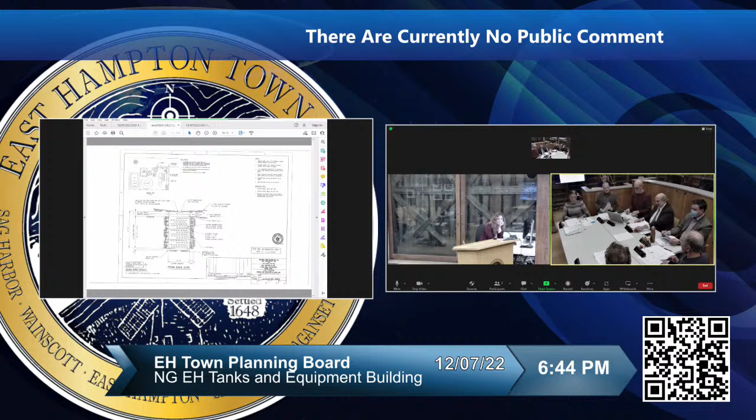This seems ready for approval to me. Thank you very much for accommodating us on the additional dry well capacity. I think that's important, and given that we've determined the truck is not a structure, we can waive the public hearing. Let's waive the public hearing. Well, we did that last week. We did, and I think it was 5-2.

So there's no public hearing on this. Right, so we have a resolution also in the regular meeting, so unless anyone has anything they want to add.

Well, I'm going to vote for it, but I want the board to consider: what if a restaurant wanted to park a 28-foot truck every summer for the foreseeable future to provide refrigeration for their restaurant? I think we're treating the utility well, and we all need the utility, and I'm not looking to block it, but I don't think it's a great precedent.

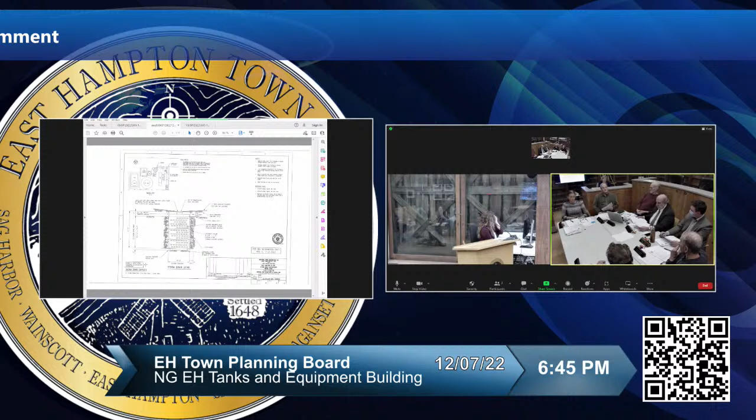What part of it? The no public hearing or the truck itself? The truck - the building inspector said the truck body would be... I don't recall exactly what the truck rules are, but if any other commercial applicant asked us to put a 28-foot truck alongside their driveway every summer for the foreseeable future, I don't think we'd be open to it.

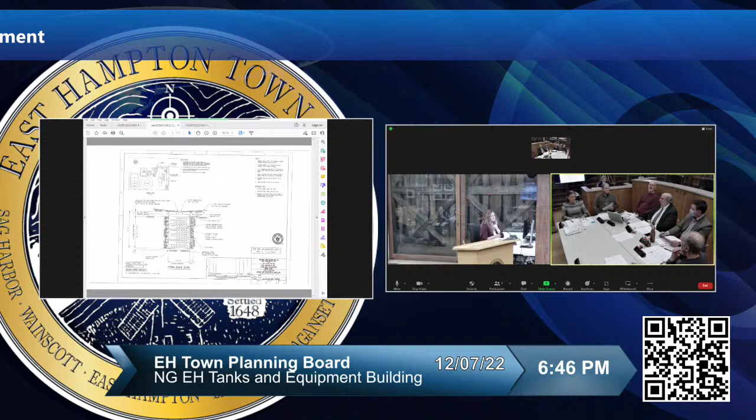Well, for one thing, this is a different parcel. I drive past it regularly, and I'm forever craning my neck to see exactly where this is. And I agree, it's not like it's in Downtown Montauk. I think maybe a truck would be okay if it was totally screened in some way, and we might consider that if it was hidden.

It's true, this is 17.6 acres. Yeah, that's another thing. Any restaurant that was 17.6 acres out here wouldn't be a restaurant very long - a wedding hall, with plenty of parking. So, all right, but I would have liked to have seen a public hearing on this, but the board chose not to.

So if anyone else has anything else they want to add? If not, we go forward with the resolution.

In the matter of the application of National Grid East Hampton Tanks and Equipment Building Site Plan, minor site plan, Suffolk County Tax Map 300-185-2-2, minor site plan approval. I have read the findings and determination document and called for its adoption. Is there a second? Second. All those in favor? Aye. Passed 7-0.

You got here just in time for the big win. It's a good thing we don't sell tickets. That was fake. All right, do you want to do more of this kind of stuff?

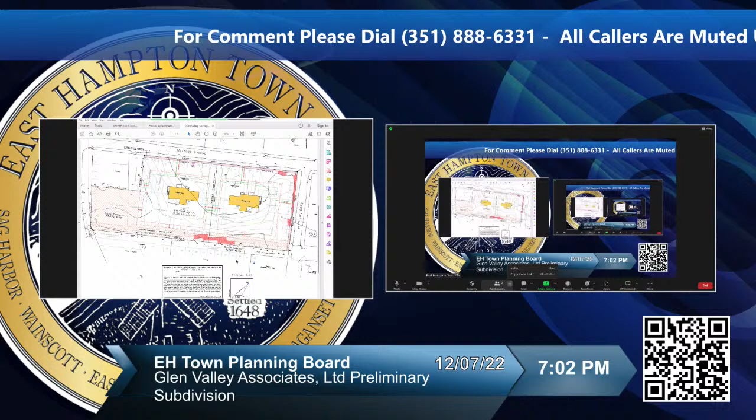Most of what he said... there we go. Okay, they're back. Matt, when did it cut out? I would say about 30 seconds ago, maybe a smidge longer.

Did it happen last night again? I'm sorry about that, I would say about 30 to 45 seconds. Ian was just wrapping up when it went out, I believe.

What do you think, does he need to reread it? I wouldn't think so, I think you've got the gist of it across. If you want to reread the last paragraph, that would be sufficient. I was hoping you'd ask, thank you. So enthusiastic about it, just the one.

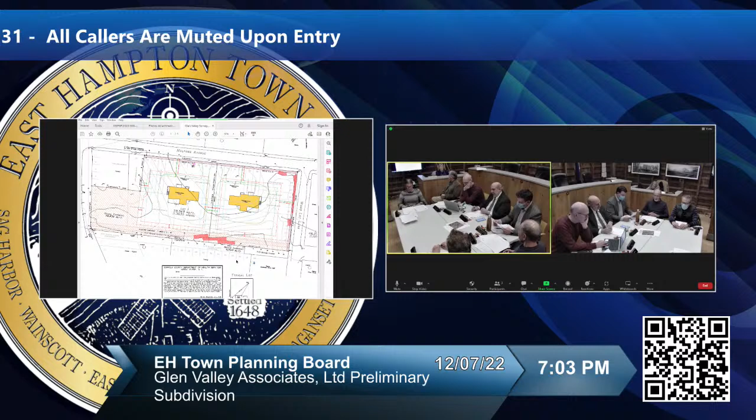Any person or party wishing to be heard with respect to the foregoing may do so in person, by agent, by attorney, by calling into the live stream, or by written comment addressed to the Planning Board, 300 Pantigo Place, Suite 103, East Hampton, New York, 11937. Comments may also be submitted to the Planning Board by email to planningboard@ehamptonny.gov. All comments must be received by the Planning Board by the date and time of the public hearing, dated November 9th, 2022. Samuel Kramer, Chairman.

That was about 30 seconds.

So do we have jurisdiction? Yes, we do, Chair. I reviewed the affidavit of service and posting, and it does appear that it was properly noticed. Very good. Want to give us a little background?

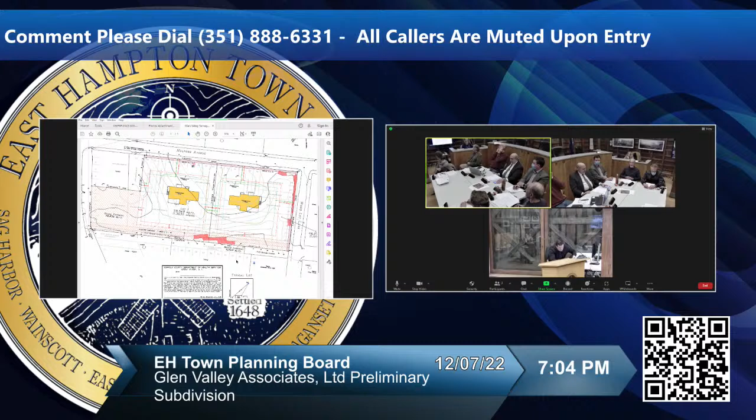This is an application to subdivide an existing parcel that's 107,795 square feet in lot area, located on Mulford Avenue and Old Northwest Road in East Hampton. The parcel is located within the Water Recharge Overlay District. It was originally reviewed in a pre-preliminary form before being reviewed in a preliminary form, as you see here, by the Planning Board.

In the course of the review, the board agreed that the parcel contains an existing 50-foot wide scenic easement on the eastern portion of the lot that abuts Old Northwest Road, and a 5-foot wide utility easement held by the Town of East Hampton on the north, south, and eastern property lines. The applicant's proposed subdivision would result in two conforming lots.

When the application was reviewed by the Planning Board, they agreed to assume lead agency status, which they did. The applicant was required to submit an Old Filed Map modification application to address the proposal's potential changes to parcel 60 in the Old Filed Map Study, and was required to submit a more comprehensive survey showing the location of all surrounding wells and sanitary systems in a conforming sanitary system envelope. The applicant submitted all these things, including the Old Filed Map modification application. So that's kind of how we got here today.

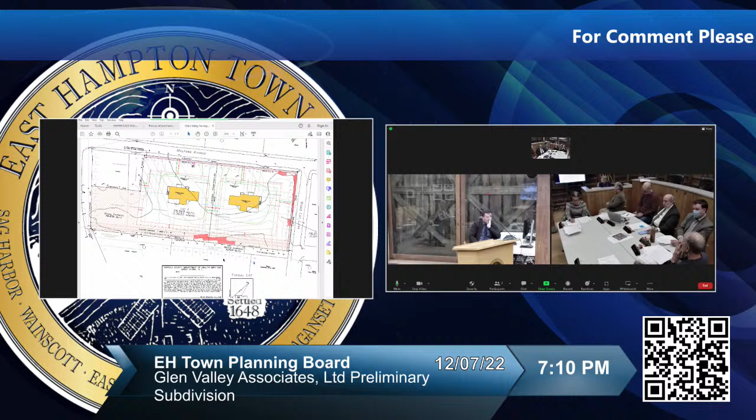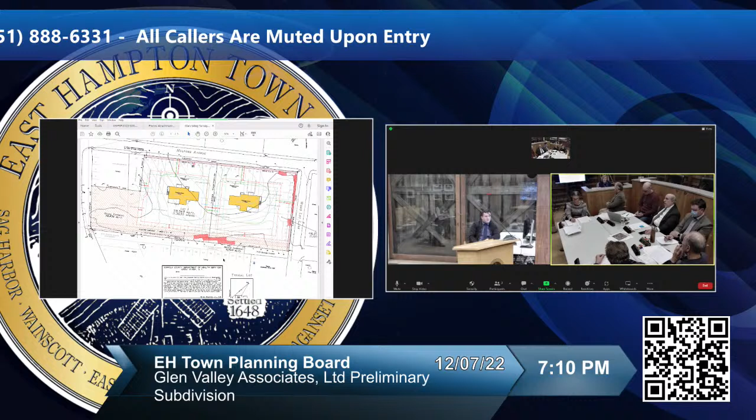Yes, we have one caller. All right, let's see if they're here on that particular application. Okay, unmuting last four digits of 2740. Hello? Hello? I can't hear the person. Can you do something with the volume, Matt? Hello? Very soft spoken. Caller? Caller? Ending 2740? Hello? Okay, call. Hang on, Sam. Yeah, okay. With, I'll, Matt, tell you what. Thank, Sam. Sam, go ahead, proceed. They hung up. They hung up? Okay, and you have nobody else on queue? Matt? Zero additional callers. Thank you.

Okay, in that case, Mr. Buda, you can resume for 3 minutes. Thank you. Ordinarily, the open space is designated as a separate reserve lot.

According to the town code provisions applicable to this matter, a minimum of 25% open space must be established on the subdivision map as one or more separate conservation easement areas, and the extent and nature of that easement should also be specified in a separately recorded conservation easement instrument, granting and limiting the restrictive easements to the town or to a private conservation corporation or land trust approved by the planning board.

Although the proposed subdivision map does indicate that more than 25% of the two building lots would be encumbered by scenic easements, I did not see anything indicating that these scenic easement areas would be excluded from the confines of the two building lots, or that they would be established by separate grant in favor of the town or a private conservation corporation. The applicant's initial filing letter dated April 1st misstates that there is an existing 50-foot wide scenic and 5-foot wide utility easement in place—I believe it's actually a road widening easement.

In fact, what he must have meant and been referring to is the fact that the old filed map study plan requires that such easements be granted to the town as a condition precedent to the issuance of any building permit. As far as I can determine, that requirement has not yet come to fruition and these are not yet existing easements.

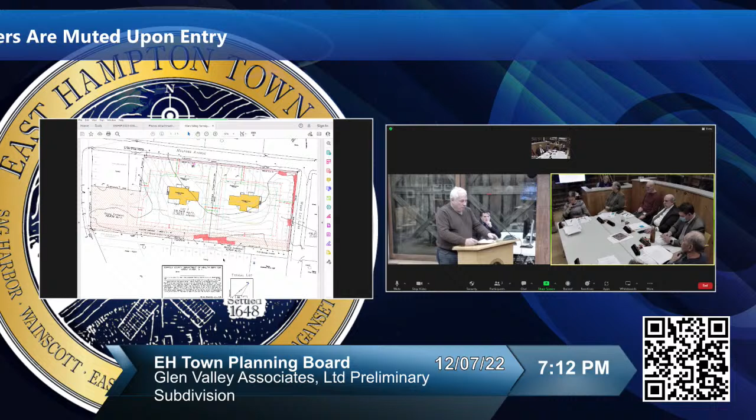I do understand that there is an ongoing parallel process for modifying the urban renewal map to conform to the provisions of the subdivision when it is granted. There may also be imposed a roadwork monetary contribution requirement, because there will now be 2 UR parcels where there was only one in existence before, when the special road district for this area was created.

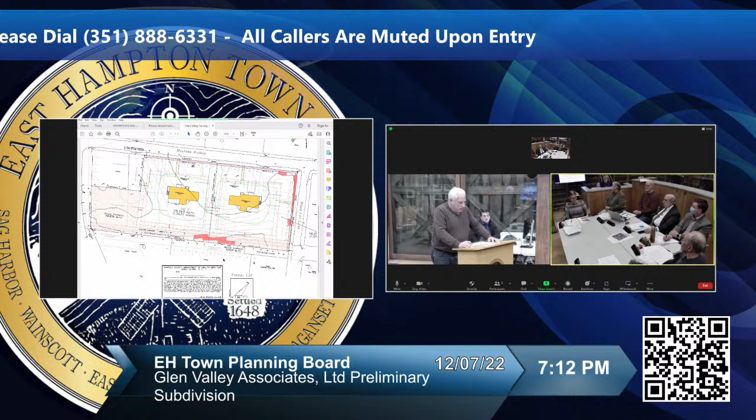I would suggest that the planning board instruct the town consulting engineer to carefully review the provisions of the UR road improvement district map, for map 284 and map 483, to determine whether or not any additional monetary contribution should be required to be paid to the town, because at the time of the creation of that taxing district, the 2 proposed lots constituted only 1 UR parcel. Thank you very much. Thank you.

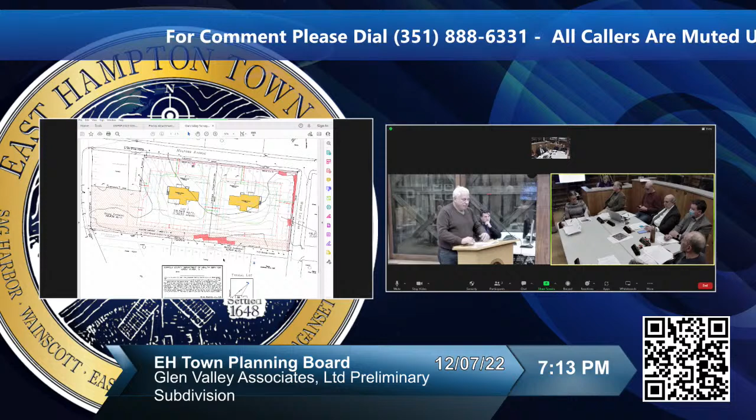40 seconds. I'll say it. No, we don't bank those.

Does anyone else have any desire to be heard right now with respect to the Glen Valley Associates application? In that case, if the applicant would like to be heard, and also 3 minutes.

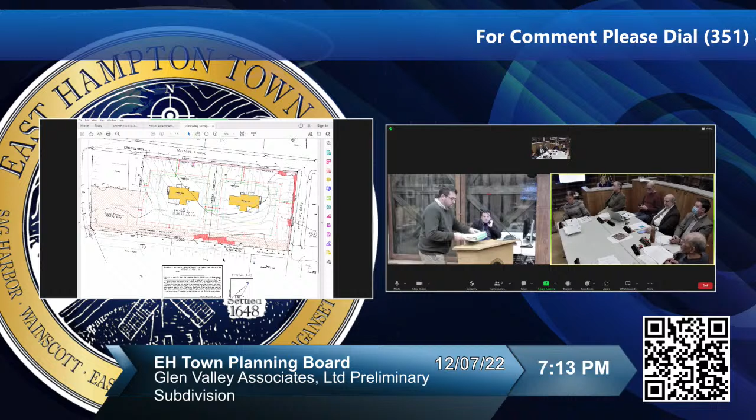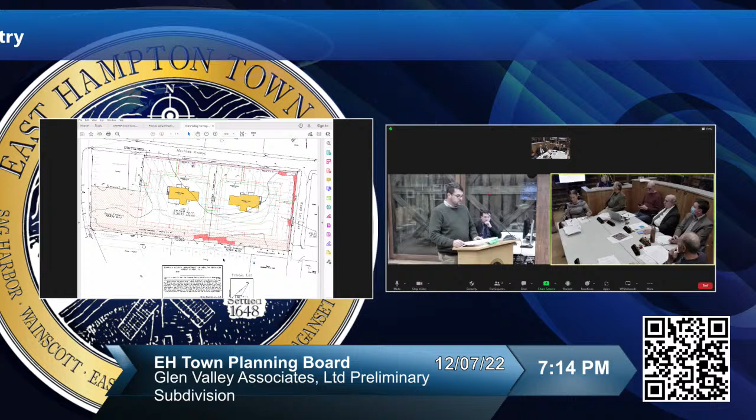Good evening, members of the board. Brian Locassi with the Adam Miller Group, attorney for the applicant. As you know, we've been before you for a few months now, and I respectfully submit that this does meet the 25% lot open space requirement. We had reviewed this with the board, with the planning department, and we set that aside. We addressed concerns regarding sloping, covenanting the 20% sloping within that set aside open space area. So we think that respectfully, we're creating two conforming lots. It meets all the criteria of the code and subdivision requirements, and we respectfully ask that we proceed with an approval for the application.

Is nobody else seeking to be heard on this? Ian, if you'd like to. Motion to close? Is there a second on the motion to close? All those in favor? Aye. Public hearing is closed. Okay, next is Pete's Garden Center.

Take notice that a public hearing will be held before the East Hampton Town Planning Board at Town Hall, 159 Pantigo Road, East Hampton, on Wednesday, December 7th at 7 p.m., or as soon thereafter as this matter may be heard, to consider the application of Pete's Garden Center and Service Commercial Site Plan Special Permit Approval pursuant to Articles 5 and 6 of Chapter 255 of the East Hampton Town Code to construct an outdoor storage yard with 3 on-site parking spaces, 7 parking spaces in the right-of-way, sidewalk, and additional fencing. The parcel contains 8,200 square feet, 0.1882 acres, and is located on the northerly side of South Euclid Avenue, Montauk, and is situated in a central business zoning district as shown on the official zoning map of the town of East Hampton, identified on the Suffolk County tax map as parcel number 300-49-1-13.3. Subject application is classified as an unlisted action pursuant to the State Environmental Quality Review Act, SEQRA, Part 617 of the New York Code of Rules and Regulations, and Chapter 128, Environmental Quality Review of the Town Code.

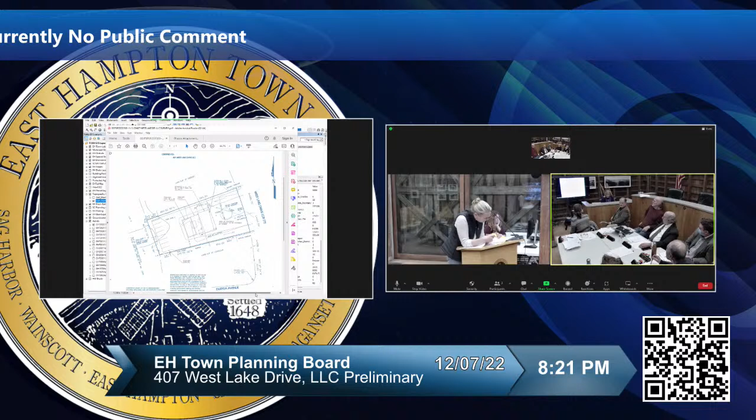The whole idea of putting parking behind buildings is so you don't have to look at it when you're driving by. It's a planning and aesthetic decision the town made a long time ago, and that's been the policy, put the parking behind the buildings so you don't have to drive by and look at parking lots. I agree with that policy, but sometimes you need to look at an individual property, and if you apply a general policy that doesn't fit, it doesn't work.

I don't think you're gonna get what you're looking for, Lou, when this is all built, and there's not gonna be a lot of vegetated open space. For one thing, there's a giant tree where they have parking right now. Maybe you keep the tree in the parking lot. How do you get the cars? Is it in the middle of where the cars pull out?

Kind of, the parking is off to the side. You can't really see where the parking is supposed to go. Do we know how healthy that tree is? You can design around a tree.

We're not very good at doing parking lots in East Hampton, honestly. We just tend to do a big macadam. Other parts of the country, they put a lot of trees and vegetation and break up the asphalt. Other places in the country have more land to play with.

So the one thing I would say is... anything else on that? You're leaning towards parking, but not in the front. Okay, you're gonna be keeping score on that. I am, okay go ahead.

Well, on the subject of parking, I like what the other hotel has along the side like that. That's all I got. And Lou, you would be okay with that too? I would prefer that than to put the parking in the back.

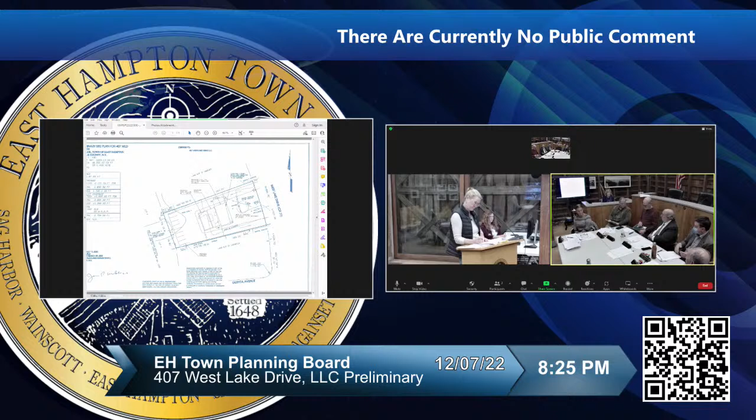I would say that one ingress and egress would be preferable, just because it's less coverage, there's more room for other things. But take everything I'm saying with a grain of salt, because this is very early in the process. Again, if you are code compliant, I think that goes a very, very long way.

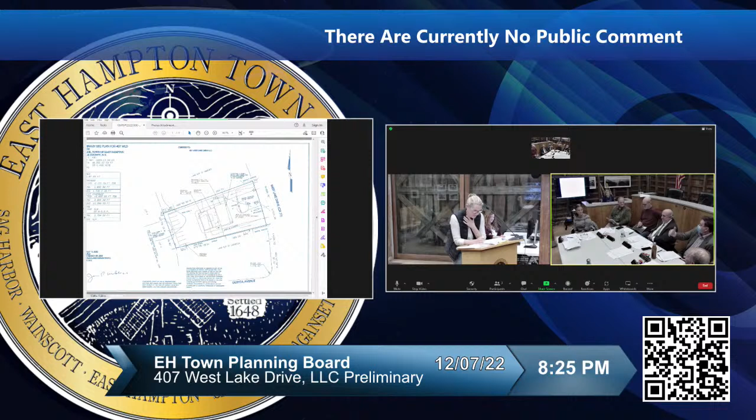As far as parking goes, I think Randy pointed out, as long as I've been part of the community, we've been a mullet planning community, with the business in the front and the parking in the back. So that would be my starting point. Parking in the back - that's what the guidance and the code directs us to do.

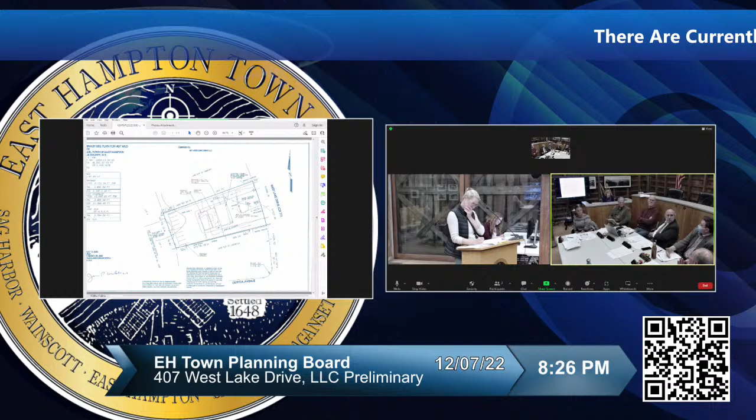I agree with Lou that there's special cases. I'm certainly open-minded to have parking in the front. The one caveat to parking in the back is that if you're abutting a residential zone, we're not going to be very likely to relax the setbacks if it's not necessary. I don't think we need to. I don't think we need to either. So I don't know enough about the property or the space, so I'm open about parking.

And the same thing with turning the building sideways, that would be a very different design. Wouldn't have a real problem with it, but I think we then would have to talk about setbacks, especially to the south, because is that still a resort district there? I believe it's a resort district, but it's a residence. Yeah, I'm almost positive it is resort district.

I think it's an interesting idea and you should explore it. But with the way it's laid out with the pool behind the building, I'm not sure that it's going to fit with what you're trying to do. So I don't have incredibly strong opinions.

I think the only thing I've said that maybe we haven't talked a lot about is if you can have one curb cut, seems like it's achievable. It would help you save a tree, it would give you more room to work. I have a slight leaning towards parking in the back, but if you do it in the front and make it work and it looks nice, I'm open, and I certainly don't want to have a tug of war here where you can't please any of us.

Good point, but I'm only one man, so. Thanks very much, Ian. Lou?

Yeah, I'm sticking with my parking. That's your story and I welcome everyone to go visit the site, and I think if you look around, you'll change your mind about the parking.

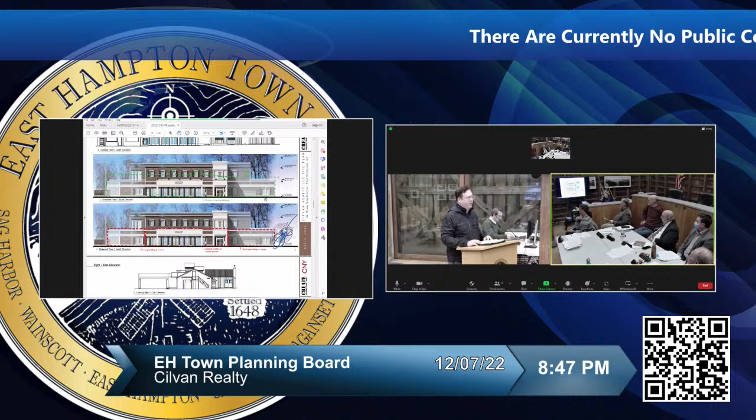Anyway, it's a complete change in the architecture. The building's pretty much about the same size, but the design is very different. As I said, I'll talk to my clients. In general principle, I would agree with what Eric said. I just don't know what the ARB schedule is. The other comments, as Eric indicated, are really just kind of the landscaping.

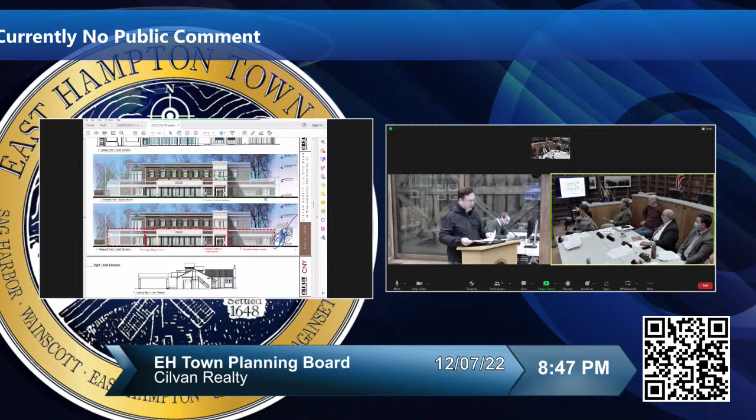Let me just say this: obviously there's importance to landscaping along Three Mile Harbor Road, but on the east side of the property you have three residential lots. The northern two are fairly old. I've been back and visited the site again - there's a pretty good bank on the right-hand side. It's almost like they dug out this parking lot when they built it, because it's down about two to three feet from Three Mile Harbor Road. And on the back eastern side, there's a bank about four feet high.

The northerly two lots, right here, both have approximately six foot tall stockade fences at the top of the bank. So they're pretty well screened, and those houses are also forward in the lot. The southerly lot doesn't have a stockade fence, and the house is towards the back of the lot. I think that's the thing that most needs screening. And I think in your memo, Eric, you refer to the screening generally on the east side. I thought we have some 8 to 10 foot red cedars in this area.

Sorry, I just flipped it 90 degrees on you. You want me to go back to the area? You'd have to look - it's easier to see, you have to look at the key. But where were you pointing? Somewhere in this area, I think we have 8 to 10 foot red cedars near that southerly house. I just wanted to confirm that.

We are proposing our own fence. I don't know how that'll work where the neighbor fences are, but we are definitely going to propose a six foot fence here. But like I said, there are existing six foot fences there, not on top of the bank - or on top of the bank. The neighbor's fences are on the bank, on top of the bank. I don't know exactly where ours will be placed.

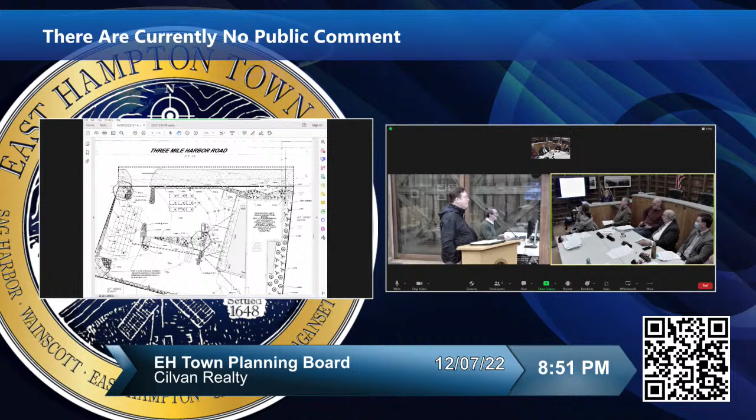But yeah, the direct answer to your question is no, I have not seen the plans for the redevelopment. Have you applied to them for a curb cut, or do you not need to? We've had plenty of communication with the county. No, we have an existing curb cut. I think we're changing it slightly, so I assume we'll need a DPW permit however we tweak the driveway. Obviously, we're removing part of the driveway. I don't know if that permission is needed, but we've been in communication with the county DPW, and whatever permits they require, we'll obtain.

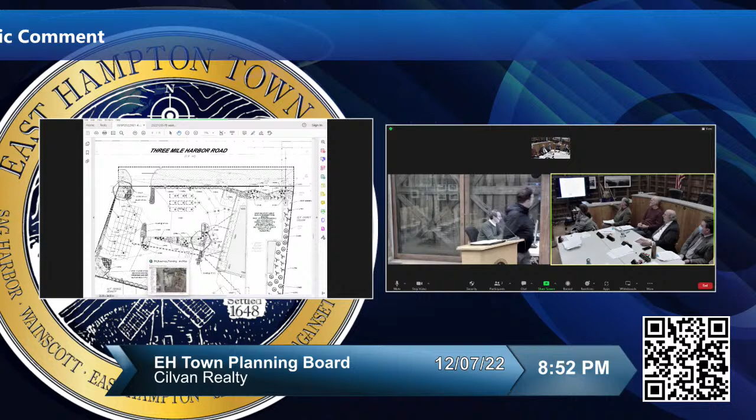The curb cut is pretty close to the existing building, if my memory serves, as it presently exists. Yeah, there you are, yes, there's two. Are they two real curb cuts, or is one a de facto curb? No, I drove out this one. Just because you used it doesn't mean it's really a real curb cut. No, they're two real curb cuts, they're actual. So you have two actual curb cuts on 3 Mile Harbor? Oh yeah, well, the proposal's only one, and it's in the right place.

That's wow, okay. Hey Rick, remind us, how tall is the vegetation that's along 3 Mile Harbor Road? I forgot, not much. There's one notable tree. Other than that, there's not much on 3 Mile Harbor Road right now.

Okay Sharon. Much improved. Yeah, actually I like the building better that you've come up with, it's more streamlined. I think we're really loving the whole gabled old house look. So hopefully the ARB likes it too. I think the lighting they're gonna take care of, it's really just the landscaping. And thank you for moving the dumpster, I think that's a huge improvement to get away from the residences.

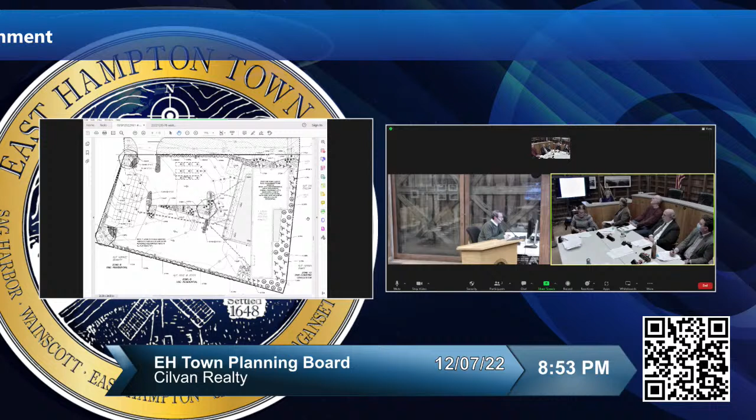It's really just the landscaping and the fact that they don't have the space to double up on that back line, and there's gonna be a fence and there's a bank. I'm not sure what else they can do there to make it any better than what it is, so I think it's sufficient.

I think I have some photos of that area too, which might help. I'll look them up while you're having your conversation, just so in case you're wondering what's going on with the screen. Thanks, Randy. You have anything you want to add?

Yeah, it would be interesting to see what it's gonna look like looking, when you drive by on 3 Mile Harbor Road. Not sure, it looks like it's fairly flat from the road. Where does it drop down? It drops down, it drops down pretty well.

So the screening... Fortunately I can scroll through different times of the year. Yeah, an empty parking lot. Yeah, there's all that greenery now. I don't know if you can see all the green. These are from about 2 years ago.

Well, we can keep going, right? Yeah, yeah, yeah, I was just... Anything else, Randy? No. Michael? Nothing to add. Ian?

Yeah, I think it looks good. I think the dumpster move was key for the neighbors, I'm glad that you were able to work that out. Hopefully that wasn't a problem with the ARB. I'll just say that as far as the architecture goes, I'm not gonna nitpick that, I think that's the ARB's world. I'll focus on the planning elements, which I think are generally good.

One question about the arborvitae in the front, my Latin's not very good. The arborvitae you're planning are not green giants, right? They're more compact, I just want to make sure that's true. You don't have to answer if you can't. I'm sure that they're not. I don't think that we have any dark green giants.

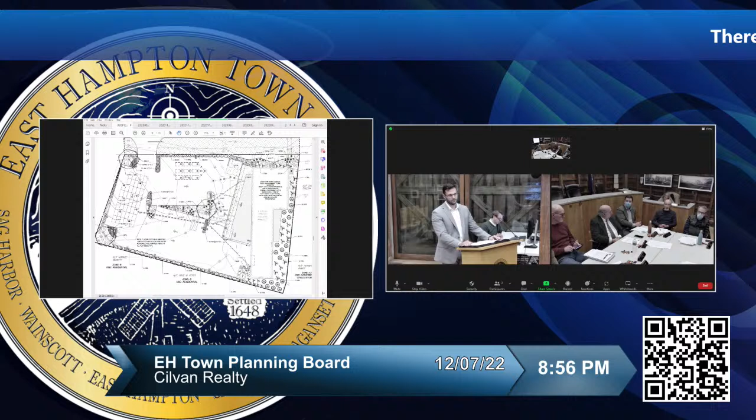Yeah, I think we've come a long way. We've been through a lot, made a lot of changes, so I think we're there. I agree with Sharon and everyone else.

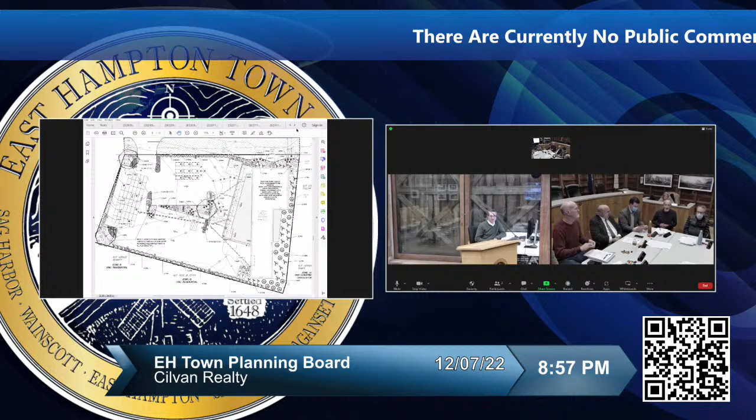As far as the ARB, I watched that meeting as you did, Rick. And boy, did they make pointed comments. They basically didn't pull any punches. They excoriated the poor person there. That was you, right? Dave went by himself. No, and I learned a lot. They delved into areas that I didn't think of, but I guess that's why they do what they do.

But I agree with Eric. I think you should get that all cleared before we have a public hearing. That's all I have to say. Thanks. I think everything's been covered. Let's move ahead.

Yeah, I agree. It's just a practical matter. If the ARB is moving as fast as it seems, you won't be held up too terribly long by waiting for them and then coming to us, and then we'll do the public hearing. We're lead agency, so let's lead.

Well, the only other thing is the lighting plan. You understand the deal, but before it's complete, you probably won't wait for the ARB, but just make sure the bulbs are all good and the fixtures are good. Yeah, I think Eric's memo makes it pretty clear what we have to address. I just don't want to leave that as a reason. You don't want to stop with the lighting plan being the reason that we don't, presumably, if it's ready, say it's complete and ready.

All right, thank you very much. Rick, what about the housing? There is housing, the covenants on the housing. Are these gonna be inspected and approved? I believe so. I haven't gotten to that point yet, but I believe we have to file covenants, Karen, and I think the housing office has to have some oversight, because they need to know that they're being rented to compliant people. Not that I think they're gonna be excellent Airbnb locations.